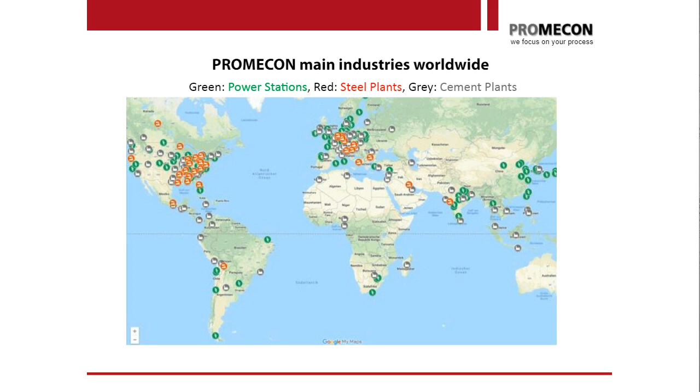So before I go into today's session, I would like to give a broad overview of the products that we are installing and commissioning for power stations. These are airflow measurements. Of course, there's a lot of airflow in your boilers, primary airflow, secondary airflow, but also gas flow that goes to the precipitators and out the stack. I've had an extensive session on this before, and I've talked about the difficulties of accurate airflow measurement in the power station, which I find one of the most neglected issues in power generation, because in many areas people don't know what the accurate airflow is into the boiler.

And that is an essential part of making the boiler better. On top of that, we have an unburned carbon monitor for better fly ash measurement, which means better fly ash management, in terms of fly ash disposal, but also in terms of better efficiency and better combustion control. And then today, of course, I will focus on the main topic, which is the measurement of fuel flow into your boiler. Fuel flow for us means, in this case, solid fuel, which is transported into the boiler by a pneumatic transport. So it can be coal flow, it can be biomass, any pulverized fuel.

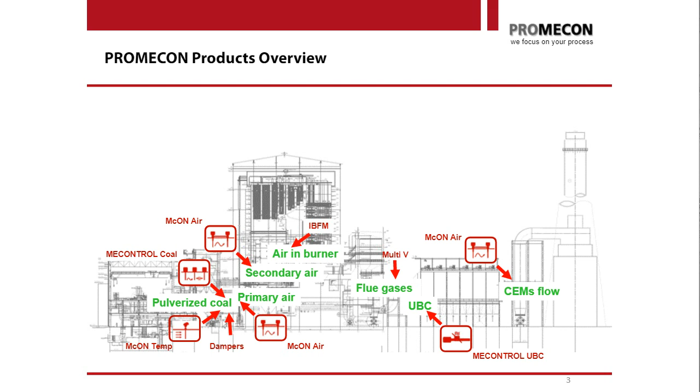Coal flow is measured in traditional power stations by the feeder that goes to the pulverizer. Each pulverizer will have a certain coal feed in, and then it will respond with a certain outflow from the pulverizer classifier into the burners.

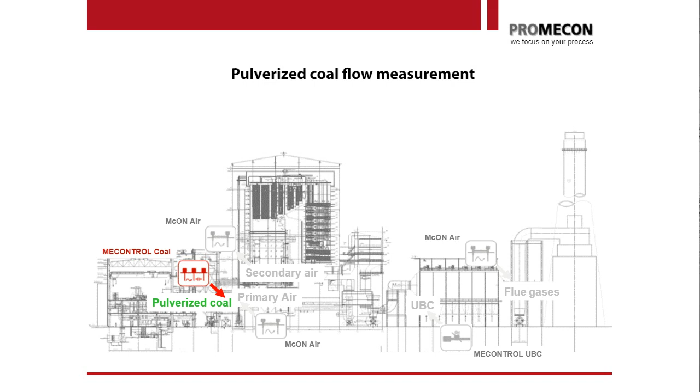Now, what is happening after the coal has entered into the burners? The coal will start to combust. And the most important curve that one who is dealing with combustion has to know is the combustion constituents - you can see this curve, which tells you how much O2, how much NOx, and how much loss on ignition and CO you get for the combustion.

We use this curve very often to explain why the measurement of unburned carbon is so important in order to tune your combustion correctly.

Before you can do that, however, you must be able to have the same coal mass flow going to each burner, because every burner has this curve. Every burner has an optimum zone of combustion where you have a right fit of excess air versus fuel. And this optimum zone is the only zone where your combustion can be maximized for efficiency and also maximized for NOx reduction.

So if you have 6 burners in a row, you have 6 of these curves. If you have 20 burners, you have 20 of these curves. Many people take these curves only for a total boiler.

So for the boiler, if I lower my O2, I see at some point my CO is going up, which you can see on the left-hand side of the picture. But the reality is, it's not only the CO in the whole boiler going up - it can be the CO of 1, 2, or 3 burners spiking first.

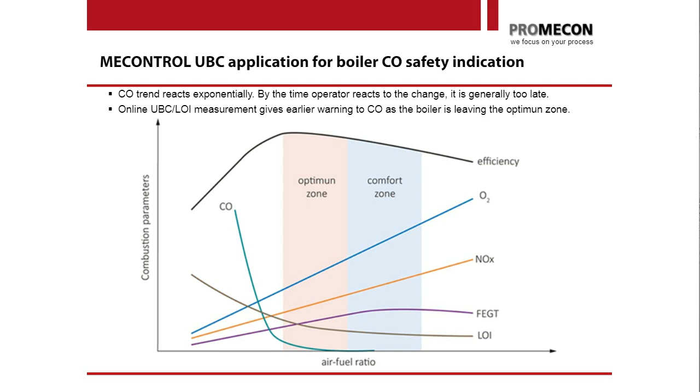Fuel flow measurement, how do we do that?

Every mill has certain outputs. Some mills have 4 outlets if you have a tangentially fired boiler, for example. If you have a wall-fired boiler, then of course you can have a different number - you can have 5 outlets or 6. But the fact is, one mill serves several burners.

So if you make the change to the feeder, all burners change. But each burner has a different flow. And it's not only true that each burner has a different flow as compared to another burner on average, but also each burner has a fluctuating flow.

So the fuel flow over time is not consistent - it's going up and down all the time. And that's also something that no one really can say, how much is that fluctuation. You can only get to know this if you measure properly.

So let's start with the first part of this presentation with coal flow measurement. How do we measure coal flow?

Traditionally, coal flow is measured by extractive methods. So you have an isokinetic sampler or a rotor probe or some sort of device where you suck coal dust out of a pipe.

There are several severe issues with this. The first one is you do not have an instantaneous result for all 4 pipes. It takes you 15 minutes to do a single measurement, and usually this is done on a pipe-by-pipe basis, so it takes about 1 hour to measure 1 round of pipes in a mill.

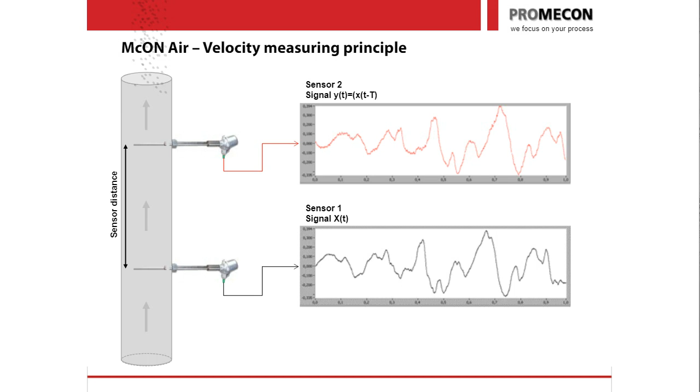If you now put these two time signatures on top of each other, you can see, yes, they are matching, but they are time shifted, right? This is the time shift. So what do we do now?

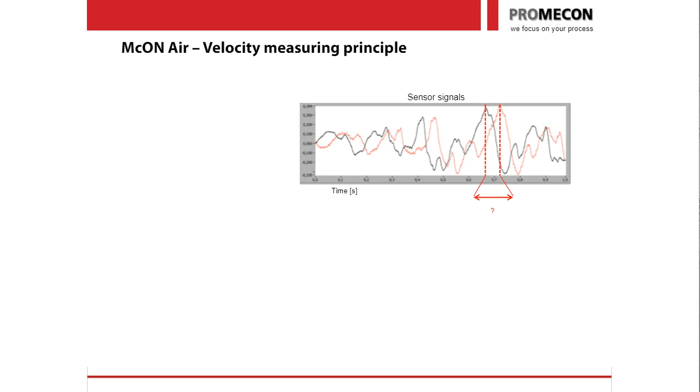We take these two signals and put them into a cross-correlation filter. What a cross-correlation filter does is take two signals and start matching them on top of each other, checking at which time shift these signals have the best match. This is called the cross-correlation function.

Now in this example, of course, you will see the cross-correlation function gives you a time. So we measure a time shift, and since the sensors have a known distance, we have time and distance. Distance over time gives us velocity. So we have two independent measurements, one for density, one for velocity. And this is very important when you want to optimize your mill.

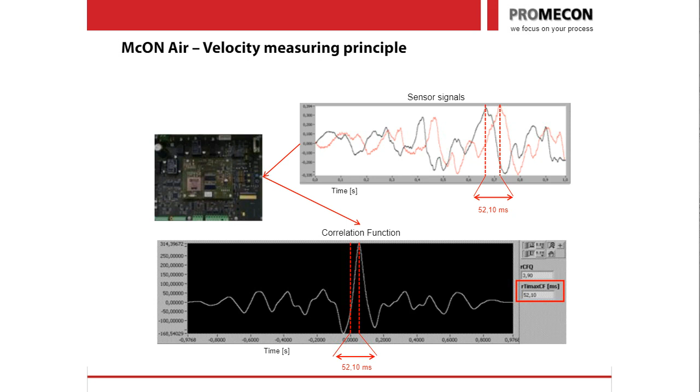After explaining how the system works, I would like to dive a little bit more into why we need these measurement properties in order to optimize your combustion.

First, let's have a quick look at how the system is specified. We measure absolute coal mass flow to each coal pipe.

Most people I talk to say this is clear, because you have to know how many kilograms of coal go into the burner, and then how many kilograms of air go into the burner, and that match must be the right stoichiometry. That's correct, so that's one thing.

The other thing, however, is we also need to measure the velocity. Why is velocity important? It's important because each burner is designed for a certain velocity.

In many plants you have vastly different velocities. One burner very fast, blowing the flame far into the boiler, causing difficulties with flame attachment. Another burner, the flame very slow, burning back onto the burner nozzle, damaging the burner. We have seen so many damaged burners in our life, usually just because of wrong velocities. So velocity is a big point.

Now, this all needs to be measured within a certain accuracy, that's clear. Here comes another thing that's very intimately tied to velocity, and this is the detection of deposit in the pipe. Many people say, why should I measure deposit?

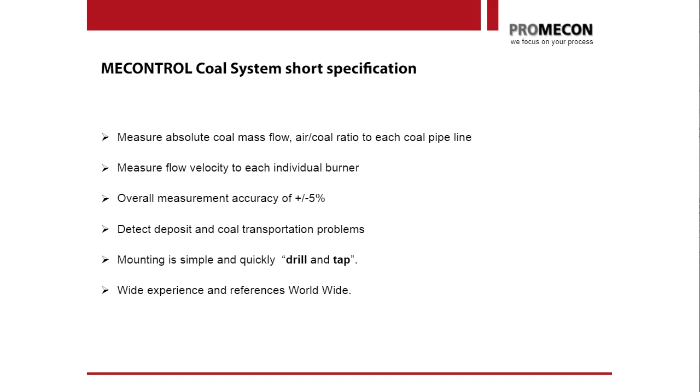Flow and transport conditions are key to good combustion, and that is at least as important as the levelness of your coal flow. That's something people very rarely have in mind. You have to also look at the consistency of your flow.

Here you can see a system, a main panel, and a local control box. We have a main panel and a local control box where you can hook up to 4 sensors, or 4 channels, 4 pipes. And then you can hook up several local boxes to a control panel.

Then you can see the sensors, the reflector rods, the cables. Nothing really exciting. The application is more exciting than the sensors, there's not much to see. Basically, the technology works very well.

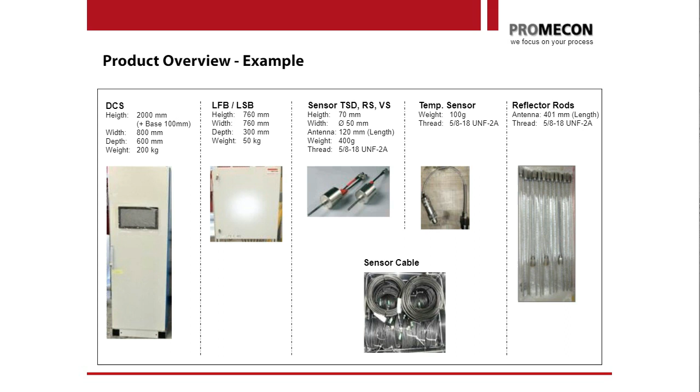Here you can see typical installation points. This is a wall-fired unit, single wall. You have 4 mills, with some horizontal sections where the sensors have been installed and some vertical sections. It really depends on how the pipe runs are.

There's always a discussion between our people about whether we should install our sensors on a vertical section close to the classifier, or close to the burner. The burner tuning people always like installation close to the burner, because they say, I have to be aware of what's going into the burner, I don't care what comes out of the mill. And there is a difference, especially in the dynamics of the flow, which we will see later in some further comments.

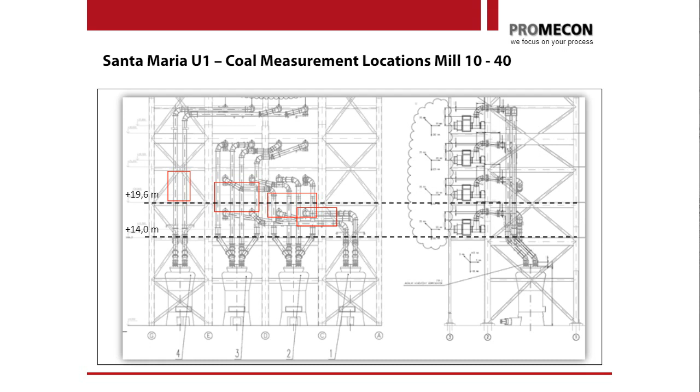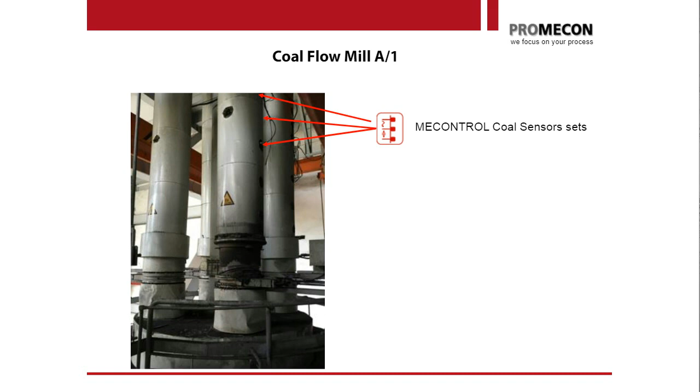Here you can see a typical installation example. It's a drill and tap installation. You drill a few holes into the pipe, you can tap them with a small plug, and later on you can insert the sensors and the reflector rods. You don't need to make big modifications to the pipe in order to install our system, even on an existing mill.

Here you can see another installation example. The sensors go in here on a horizontal pipe. Very simple and easy installation.

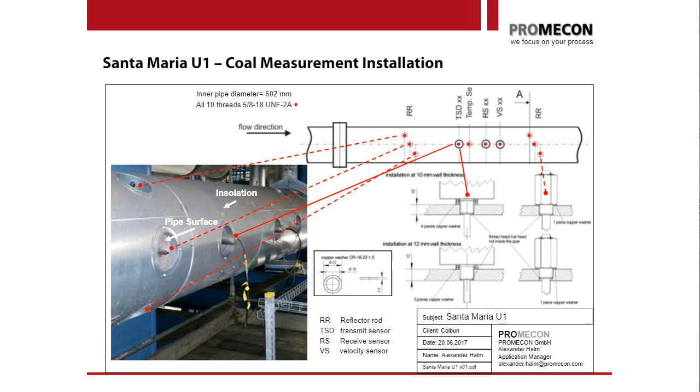So we have to talk about another very important issue. When you are measuring coal flow distribution and you find that you have a problem, how do you correct the problem? That is at least as big an issue as the measurement itself. We have many clients, they see they have a problem, what can they do about it? And there have been many attempts in the power industry to fix it.

Most of them with variable orifices. So you have an orifice in the pipe that changes the diameter of the pipe, and by this you change the flow resistance from the classifier to the burner. Good idea, but this only helps you with velocity distribution. A variable orifice will help you with velocity equalization. It will not help you necessarily with mass flow.

Why is that? Here you can see in a small schematic the outlet or the turret of a mill. You can see the outlet pipe, and you can see this big basket-like case below where the coal or the PF is swirling upwards, and as it swirls upwards it hits one pipe and then it goes out the pipe. Now you must understand that many ropes that you have are already originating from the mill. So you have a rope that is spiraling up the turret and it hits one pipe.

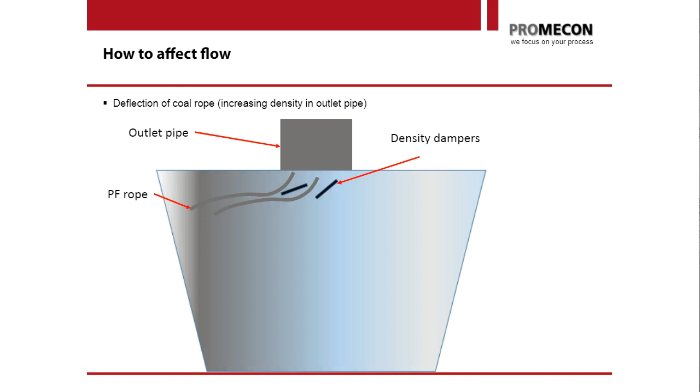So here you can have a drawing. You see how this looks like. You have all these paddles there installed below the outlets.

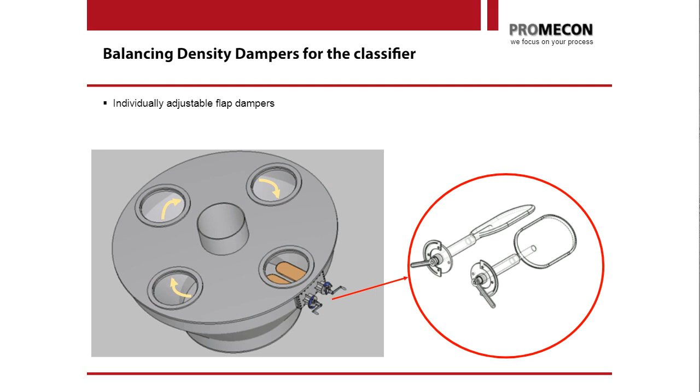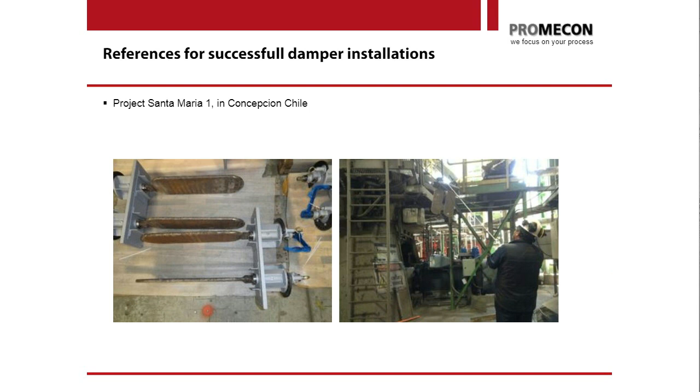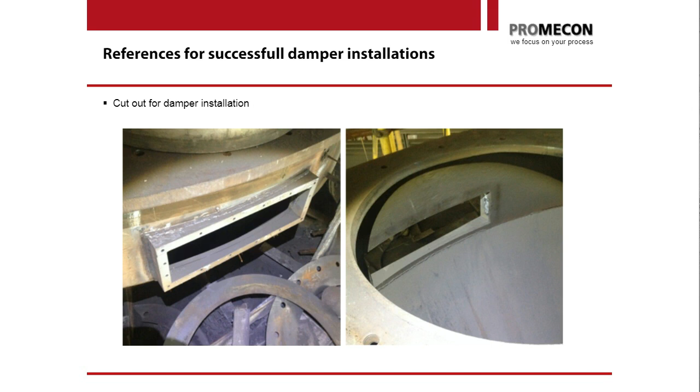If you want to see this in live pictures, here are the live, it's an example of an installation that we have done. You have the pedals as an assembly, and then you can see how the pedals are mounted on the mill. You can see here the mill turret, the outlet, where the pedals have been installed. So you modify the outlet, put the pedals in. And here you can see, finally, this is where the pedals have been installed on the mill turret, on the outlet, and can be moved easily.

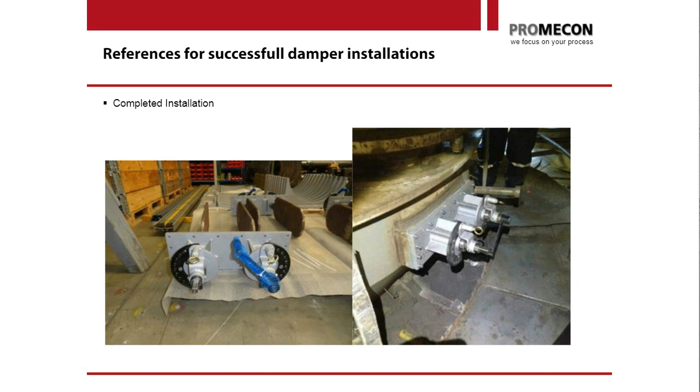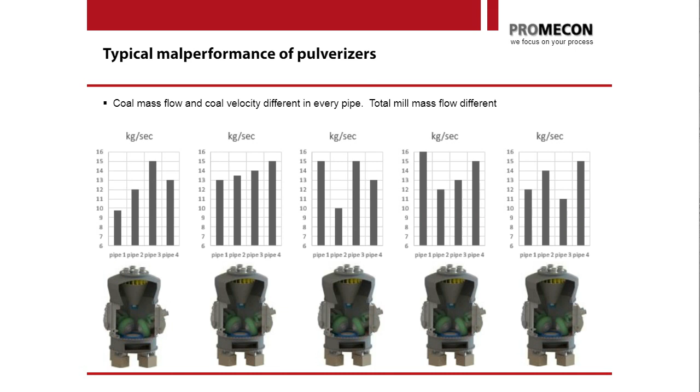Not a big deal to do. What can you do with this? If this is your outlet before you have installed the pedals, then this is your outlet after you have regulated the coal mass flow. This is by far the best way to move coal from one pipe to the other and have the same coal flow on every pipe.

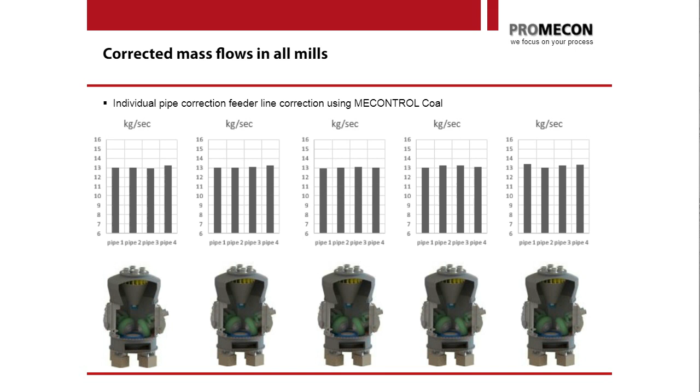Or to show you another example, this is a typical example of a coal distribution project that we have done. 6 pipes from one mill before and after. Right? Now, what is the effect of the flow balancing?

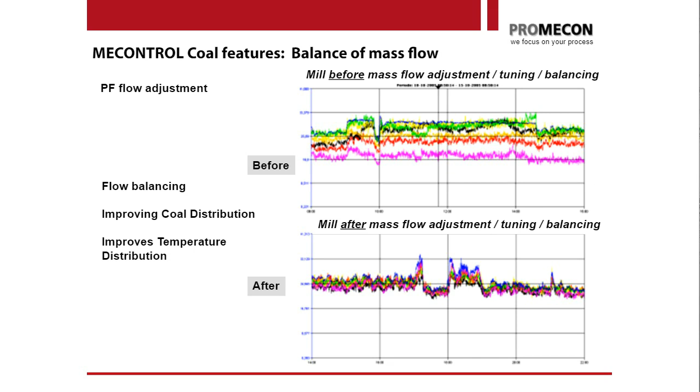The effect of the flow balancing, of course, is that you gain a lot of O2 headroom. Right? If your flows are balanced now, the airflow is balanced, as I showed in my last lecture, and now the fuel flow is balanced, your whole boiler can live with quite a lot less excess air.

With an unbalanced boiler, you run some pipes under stoichiometric and some over stoichiometric. If you balance the pipes so they're all stoichiometric, you can pull back the excess air a lot. That means less boiler loss and a huge reduction in FD and ID fan power. So optimizing the excess air ratio of your boiler is a big help in maximizing efficiency. Needless to say, you also reduce the formation of CO, unburned carbon, and NOx. So all thermal and stoichiometric problems can be reduced.

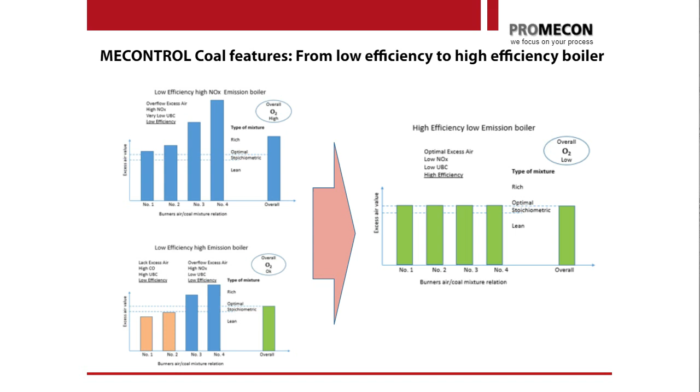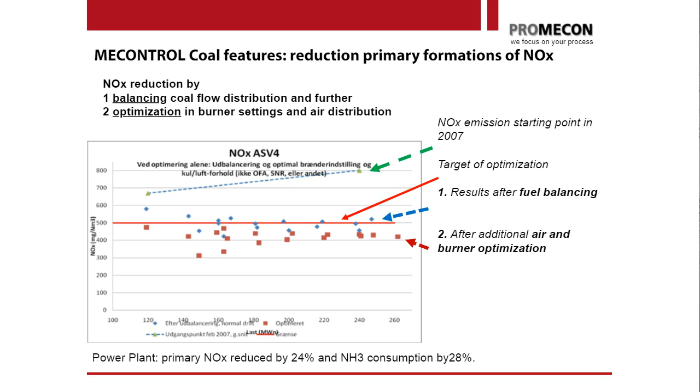Now here's another problem I've already touched upon: pulsation of flow. Many boilers suffer from the fact that the burners are not giving a consistent flame, but the flame is pulsating in and out. That means your flame is never running in the right stoichiometry. You have this wonderful, very expensive low NOx burner, and you see that it's never running in the right stoichiometry. Why?

In many cases, long pipes are storing the coal. You have coal on the bottom of the pipe that's pushed out only occasionally, and you can see the coal level building up. We can sometimes see that in the velocities rising. At a certain point, the coal is pushed as a dune or plug further along, and sometimes it reaches the burner and bulges into the flame uncontrolled, giving huge CO spikes and bad combustion. Many clients I visit in Asia, Europe, everywhere, have this problem. Very often I see power stations where the paint has come off the coal pipe - a sign there was a fire in the coal pipe. It happens from time to time. This is all a sign of coal deposit and uncontrolled coal transport.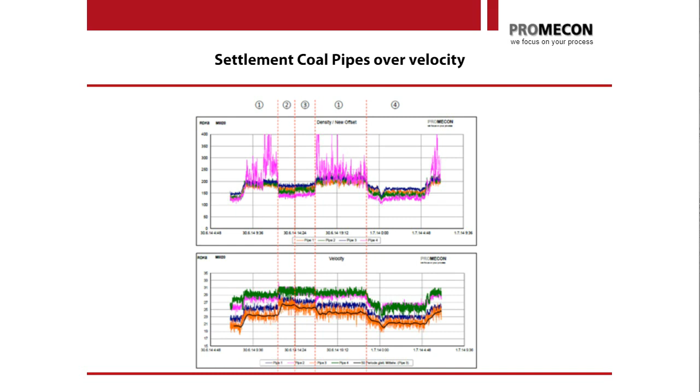So with that technology, you can mitigate that. Here's another example. On the left-hand side, you can see the graph, the pink curve going all the way up to the roof. This is the density that we measure, and that means there's obviously a huge deposit in the pipe.

Later on, when we increase the air at the end of that graph, as you see on the lower graph showing transport velocities, the density all of a sudden collapses again. So this was a typical example of a pipe filling up with material and then being released again. Very common problem.

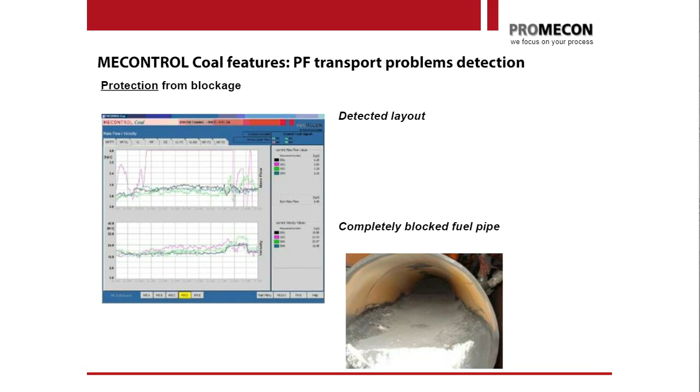Now, I don't want to say what can happen if you don't take care of that. I was talking about the paint that comes off the pipes sometimes because you have the pipes overheating and there's a fire. This is what can happen if you have inadequate velocities. But even if it doesn't get as catastrophic as that, the right velocities are key to getting your combustion right.

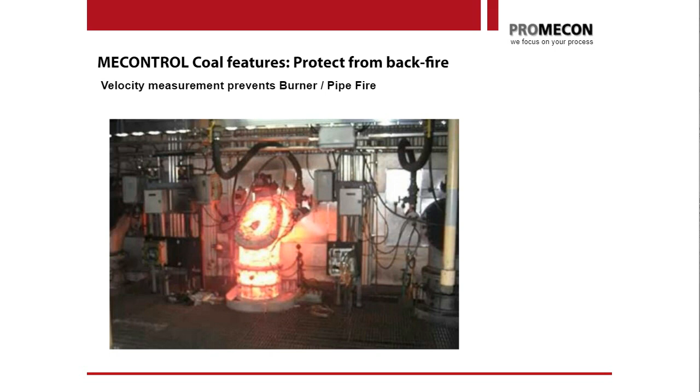Now, everything I've told you so far means that you can make changes to the coal mass flow distribution from one burner to the other, and you can try to stabilize your flow between the classifier and the burner. So leveling coal flow from burner to burner and leveling coal flow over time, so you have a consistent flow. This is, I would say, 90%, 95% of what you can do to make your combustion really better.

I've seen a lot of hardware solutions, a lot of repiping, revamping of burners and mill outlets. I tell you, the most important thing is that you can measure what you're doing and that you have something to adjust. You need to have an adjustment. So your variable orifices are fine for velocity, and the pedal dampers that I showed you are essential to be able to move the coal from one pipe to the other before it enters the pipe. Coal mass flow control is done before the coal enters the pipe, not inside the pipe. That's too late.

Okay, this is basically what I wanted to talk about today. I have another very important issue, which is, of course, the control of the plant itself. I know that many of you have issues with NOx, with unburned carbon. You would like to make your combustion better. But for many of you, also in Asia, renewable energy is on the horizon.

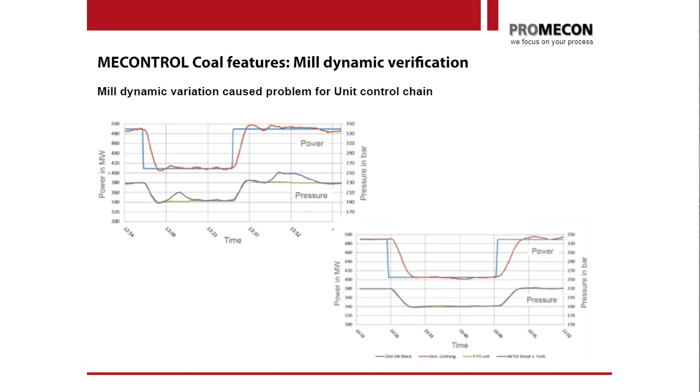And the way this works, of course, is that you have a feeder, you have the mill, and you can see the mill is the biggest time delay, the biggest time constant in this whole line. And this time constant is unknown. By introducing the Promecon measurement, the controller now knows when this element in the control chain will start reacting. And by this, it is far easier to optimize the boiler response and have the boiler reacting better.

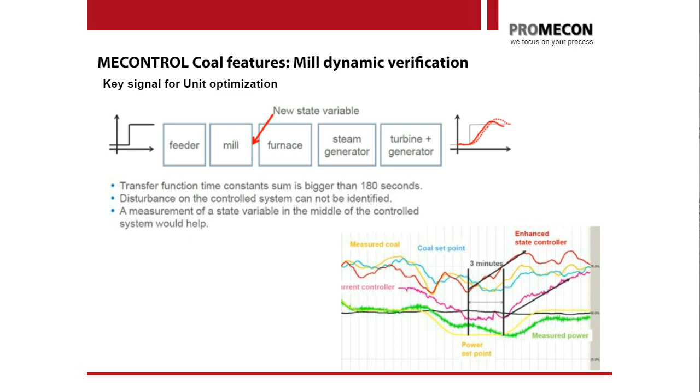Now, one other thing I would like to mention here, and this is quite interesting, we are just beginning to dive into this, and we will have far more data available in the next month on this issue, because it's a very, very interesting subject. And this is mill dynamics on the burners.

If you have a constant feeder into your mill and you have a constant airflow into your mill, what we have seen with the installations that we are currently doing is that you have a very big fluctuation on the outlet of your mill. Your mill is not completely constant in the outlet because the mill has pulsations. So the coal level inside the mill fluctuates. The coal output fluctuates. So you have a constant feeder in, but the mill is doing this all the time. So the mill already gives you a large fluctuation that will show up on the burners later on. This is especially a problem with low-grade fuels and also with biomass.

So the idea is here to use the state controller in order to vary the inputs to the mill, so let the feeder dynamically go up and down in order to keep the inner state variables of the mill constant. So we try to optimize the mill so that the bed depth is constant. And the result is that the output gets far more constant. So in this picture you can see, once we vary the feeder accordingly, the output gets more constant.

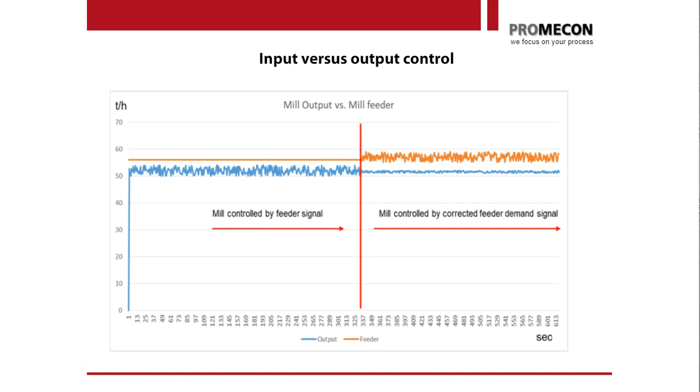It's a little bit like balancing a broomstick. You have an input variable that you keep on going back and forth with in order to keep the output constant. And an example of that is this one here, where we have a mill. You can see that red line that's with the controller switched off on the left-hand side, and on the right-hand side the controller is switched on. And you can see how the output of the mill stabilizes vastly after we have switched on the controller.

And I can only tell you, in summer we will have another webinar in June, end of June, where I will talk more about this property of how to control your fuel input to the boiler with this state controller. It could help a lot of power stations to get rid of the feeder bias, but also have a far more consistent fuel feed to the boiler from the mills. Because many mills are pulsating on their outlet, and people can't measure it.

People don't realize it. So that brings me to the end of this session. I hope that you have seen some interesting news from us and some interesting aspects of how to optimize your combustion system. And I'm now happy to take your questions and answer any of the questions that you might have. Thank you very much.

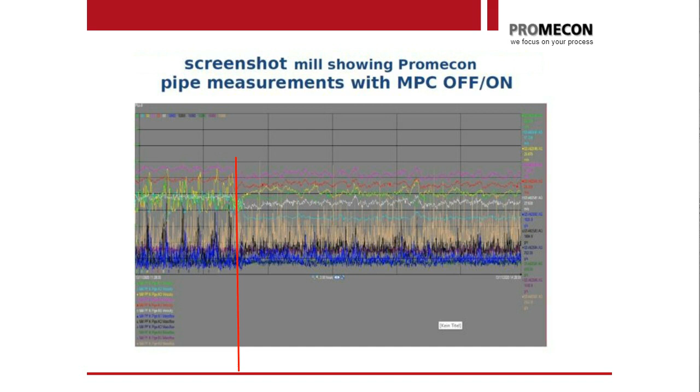First of all, our experience is about 25 years, and this is the first system that we brought to the market.

Now, what is this system doing? This system is measuring time, and it's measuring time for the frequency shift as well as for the velocity. And I will explain how this is done.

You have a frequency shift in the pipe. You have the pipe, you have the two sensors, and you measure the resonance frequency. A frequency measurement is a time measurement. It's measured by a quartz oscillator.

Now, digital time measurement devices, of course, have a drift, but the drift is 10 to the minus 6, 10 to the minus 7. Time measurement is the most accurate long-term measurement that mankind ever invented. And modern quartz-stabilized time clocks are extremely accurate. You could actually say practically they don't drift over their lifetime. So therefore, if you have this frequency measurement, the frequency measurement will always be based on the same time measurement. So the drift is 0.

What can change is that the pipe will over time have a slightly different zero offset, because over time the wall thickness will change, or there will be some material sticking to the pipe. In this case, the zero point could slowly go away and take a different position. How do you account for that? When you blow the mill empty, when you take the mill out, you will see the empty pipes, and the system will recognize what the frequency was at the last empty cycle. So if there's a difference, you will get an alarm telling you your system is not zeroed accurately, so you have to, it's basically like a tare, like you have on a weigh scale. So you have to tare the system from time to time for frequency.

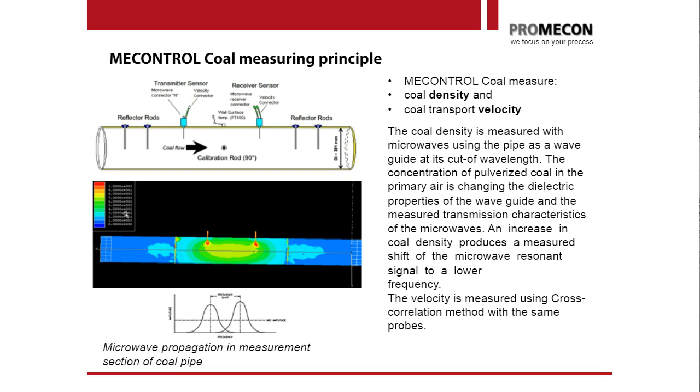For velocity, I must say, velocity has no drift at all, and also no mechanism for re-zeroing, because there is no zero. We measure a direct time shift. The systems that we have put in years ago, 10 years ago, they have never been recalibrated. No plant has ever changed any calibration in order to readjust them. Those systems are calibrated for life.

Thank you very much. Another question: Hans, you showed us multiple pipe exits from mills and paddles to divert rope or break rope. What about single pipe outlets? So a different paddle arrangement before a bifurcator or trifurcator will be required, am I right? Yes, the answer is already contained in the question, absolutely correct.

If you have bifurcators or trifurcators, you will then have a baffle plate, or basically a diverter plate that you can move left to right, and that works equally well. The only thing you have to make sure is that if you have a rope in the pipe going very fast, the bifurcator plate, the diverter, is working halfway okay. Because if you have a rope hanging in one corner, you can have a very non-linear relationship between diverter plate position and split. So it might be a bit fiddly to get it stabilized, but the picture I've shown you with the 6 pipes that we got together, that was with exactly such an arrangement. 3 outlets on the mill top, and then bifurcators on each pipe, so you have a common outlet of 3 pipes, and then 6 pipes at the end. So that basically works very well.